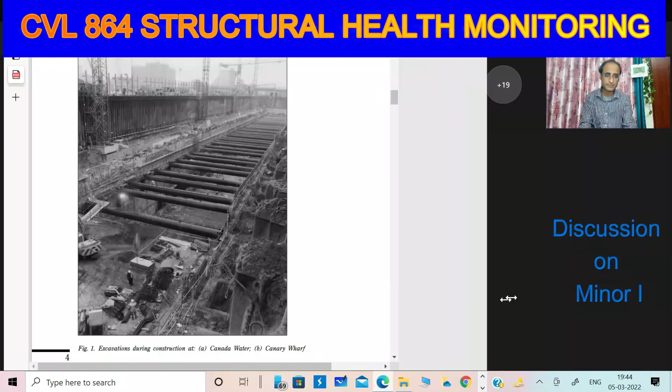This is an underground excavation. So anyone here from the part-time students who is involved in metro? Yes, you sir. Please call out your names because I'm not able to see your pictures. Who are working in metro? Sir, Himanshu. Oh, Himanshu. Okay. Sir, Akanksha. Himanshu and Akanksha both are working in metro.

So do you do any monitoring over there? Structural health monitoring? Or is it a different department? No, sir. Not right now, sir.

Okay, so basically what you see here is an excavation, and excavation needs to be guarded by vertical panels, and these panels are kept in position by these circular compression members. These are pipes. These excavations are quite deep, 30-40 meters.

Struts. So there was one accident in Singapore in 2004, Nicoll Highway Expressway, where one of these struts buckled out. When it buckled out, that led to increase of the forces or stresses in the other adjoining struts also. So eventually it broke down, and it caused sinking of the highway nearby. So these should be monitored.

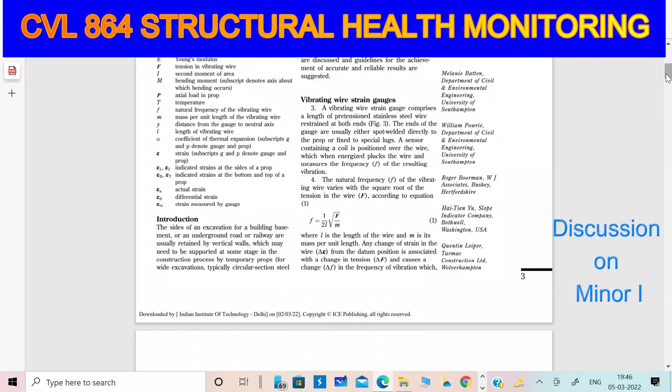So here I am showing you this paper. It's a very interesting paper written by Batten, and these people are sort of pioneers in monitoring underground excavation. Sir, is it the Nicoll Highway? No, this is different. They have done monitoring in other parts of Europe.

Okay, so they suggest that if we are monitoring a circular section and we are interested in finding the compression forces, we should instrument at least 3 sensors. At least 3 sensors should be there. That's what they are advising.

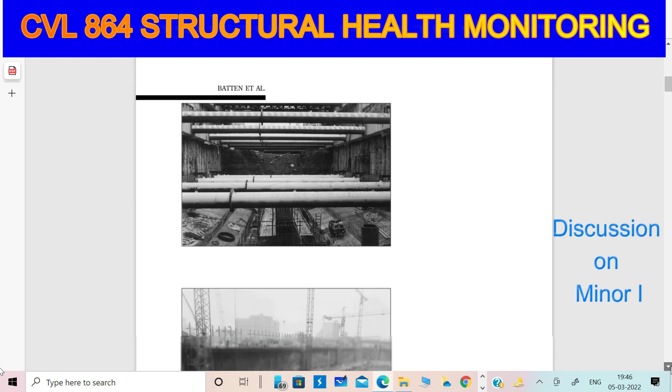Why? Because when we are subjecting a strut to compression, unwanted bending will always be there, because struts which are very slender show a pattern of being drifted on one side on account of the compression forces. That's like the precursor to buckling.

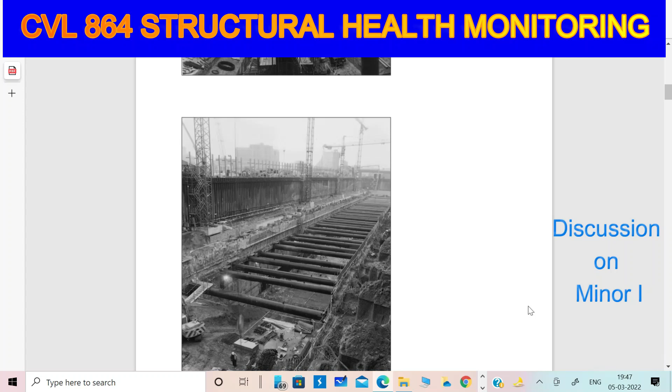So to eliminate the bending stresses, it's very important that we should have multiple sensors, and they advise a minimum of 3 sensors, at least 3 strain gauges. Then we can measure the actual force to a reliable degree.

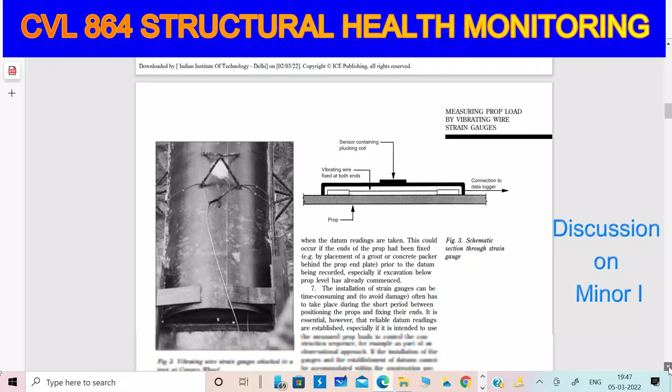So it will be very good to read this paper, because they have done a lot of practical studies with the underground metro. I'll share this paper, or you can find it yourself. It's available in open access also. And now I want to highlight something. Let me share the Word file, the question paper, and then we'll discuss it, and I'll also show where the mistakes were.

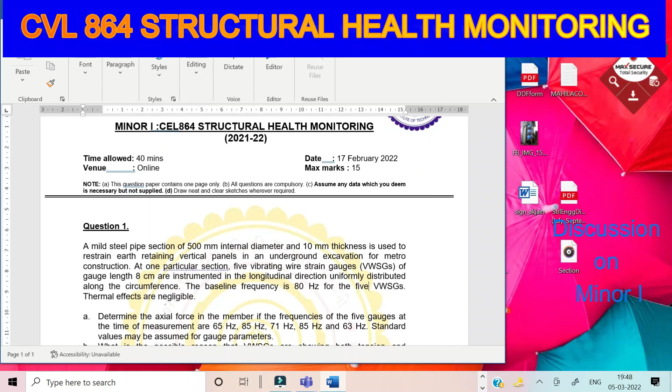So question number 1. A mild steel pipe section of 500 mm internal diameter and 10 mm thickness is used to restrain earth retaining vertical panels in an underground excavation for metro construction. At one particular section, 5 vibrating wire strain gauges of this gauge length are instrumented in the longitudinal direction. The baseline frequency is given for these 5 sensors. So these details were given.

So you were asked what is the actual force, because we are getting different values here. Some are showing tension also. So what is the force in the pipe? That's one question. And second, why are these vibrating wire strain gauges showing both tension and compression, while we understand that the pipe should be under compression?

So the part B reason must be clear now, because whenever we subject a slender member to compression, there will be some bending because of the tendency to undergo buckling. That is the reason that although the member is under compression, some sensors are still showing tension. Alright, and part A.

So in part A, most of you made the mistake of using only one sensor to calculate the axial force. No, you have to use all, but they are not to be algebraically added. You have to find the average strain. The average strain will eliminate the bending effects.

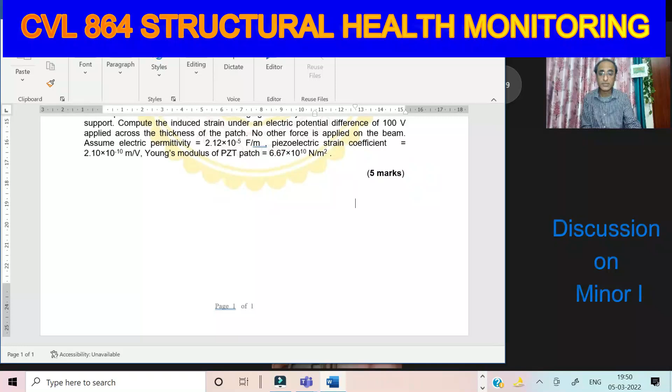Now let's see some of the possible configurations, so that will further answer your queries. Some of you have raised queries. So let's say I choose a circular section. I am using a tablet pen, and let me just draw something first. Insert shape. Let me insert some circular shapes.

Sorry, this is... sorry, I am a little bit stuck. Just give me a minute. Yeah, now it's in control.

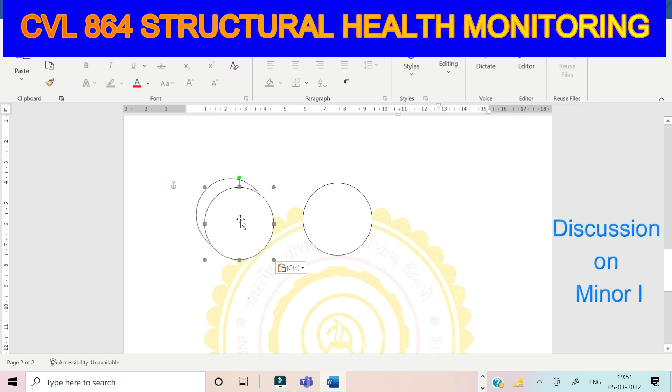Let me just insert here circles, shapes. Let me make 2, 3. I hope my screen is visible to everyone.

Yes, sir. Okay, so let's say I am using the draw command. In general, can we predict about which axis the member will undergo bending? If we have a circular section, is there a way to predict which would be the axis of bending? In the case of an I section, it would be very pragmatic to say that the buckling tendency is about the weaker axis, right?

Or if bending is happening because of some other reasons, then we can make some guess. But in the case of a circular section, can we make any guess about the axis of bending? The answer is no. So what we do is identify that the bending could be about the horizontal axis or the vertical axis, or a combination, right? We can always split the bending.

So if, for example, we are installing only one strain gauge, let's say here, will it give us an accurate value? Can one strain gauge give us an accurate value? No, sir. No, because it may be in the tension region. The strut is under compression, but the strain gauge may show us tension, because we never know.

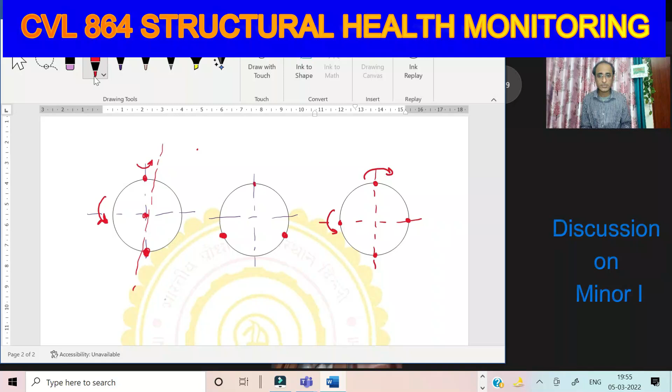Okay, but let's say we have only 3, will this be okay or not? Let's say we have only 3, but they are uniformly distributed, at 120 degrees. So we have here and here, these 3 are there, 1, 2 and 3. Will this be able to eliminate bending? What is your call on this?

How much is this angle? This angle is 30 degrees, right? So what is your call? Is this three sensor configuration suitable or not? Let's say the bending is about this axis. Then what will happen? Will the bending be eliminated or not? I think no, sir. No?

See, what is the distance of sensor number 1 from the neutral axis? It is the radius. And what is the distance of 2 and 3 from the neutral axis? Because the angle is 30 degrees, it's half the radius. So whereas this one is under compression, these two will be under tension, but the tensile strain will be half of that of the compression one, if we assume everything is in the linear range. And the combined strain from 2 and 3 will be just equal to the one in compression. Do you agree?

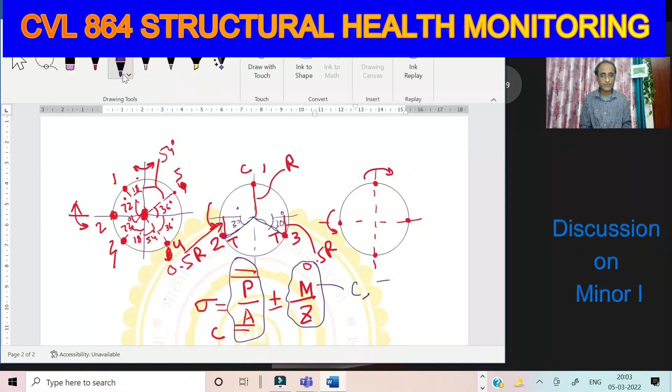So if the bending is not very significant, then the net will always be compressive. But if the bending is very high, if the member is showing the tendency of buckling, then at some places the net could be tensile. So the distribution could be like this. You understand?

Yes, here we have compression, but at some places we can have tension also. So when you are doing the averaging, that process eliminates the bending. Sir, for that we have to add the absolute value or not? What do you mean by absolute value?

Sir, I mean, you are saying this tension part, if we subtract the tensile strain from the compressive strain, it is going to eliminate the bending. Yes, finally it is going to be averaged out. So absolute, what we are doing is we are using the 4L square, then rho, then the Young's modulus, and then the F2 square minus F1 square. So this is the baseline frequency.

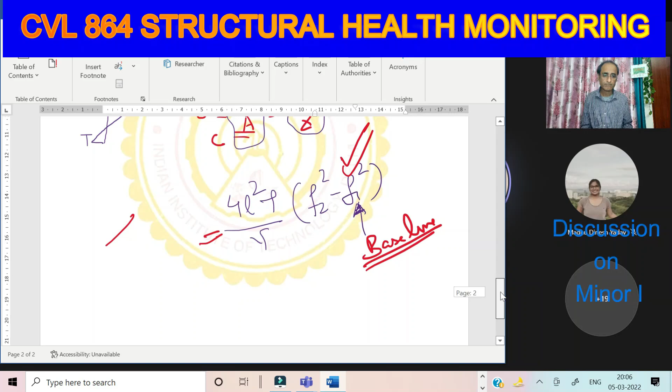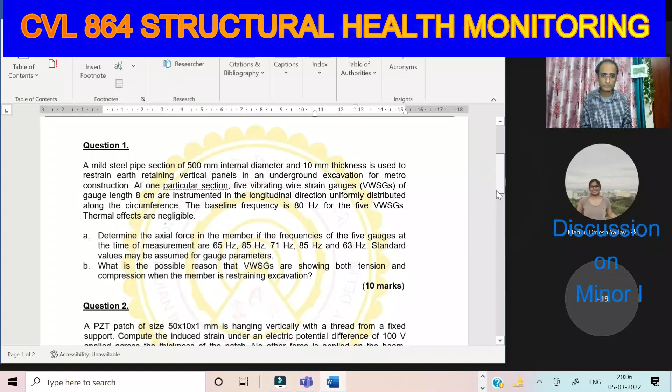Sir, suppose we have one case with only two sensors, one at the topmost fiber and one at the bottommost fiber. Suppose an eccentric load is acting in that case. If we are going to average out the strain values, how are we going to get the load value? I'm still a little bit confused regarding this.

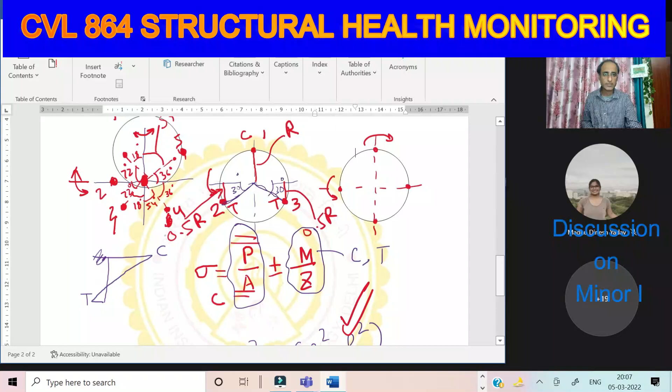Let's say we have, let me go to next page. Theoretically you can show it, you can convince yourself. Let me just rub this out. Let me go to the next page and I'll just show you.

So basically, when you add those two, Himanshu, that axial component will be twice. That's the reason averaging out will be needed. The M by Z components will eliminate each other, but the P by A component will be considered twice. Himanshu, I hope you understood.

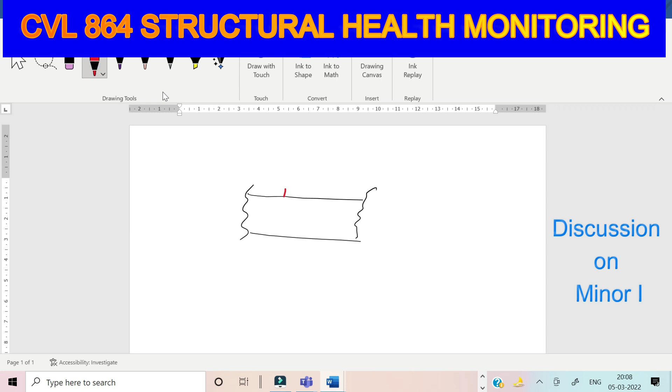Let's say we have a beam, not just circular. We have gauges at the top and the bottom. The same technique we use with piezos, but let's say here we are using the ESG. Let me just draw it correctly. So this is one gauge, this is the other gauge, just two. This is, let's say, the neutral axis. So for example this is under both tension and bending.

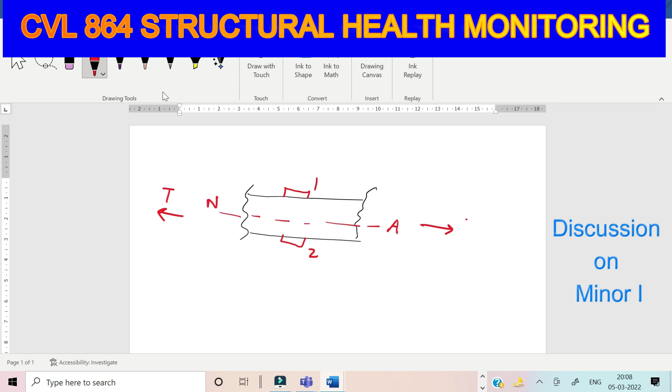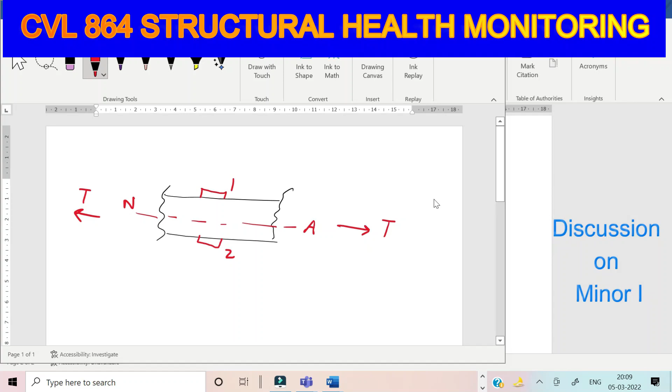Screen is not moving. Is my screen visible? Sir, it's frozen. Okay, let me unshare and share again. Is it visible now? Yes, sir.

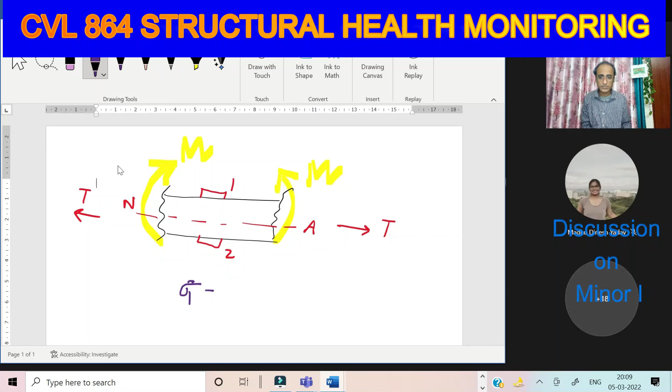So I have drawn here this section which is under combined axial force and bending, showing a sagging moment. So what will be the net strain here? For the top one, putting it in terms of stress, it will be P by A minus M by Z, and for the bottom one, P by A plus M by Z. I can just change the symbol from T to P.

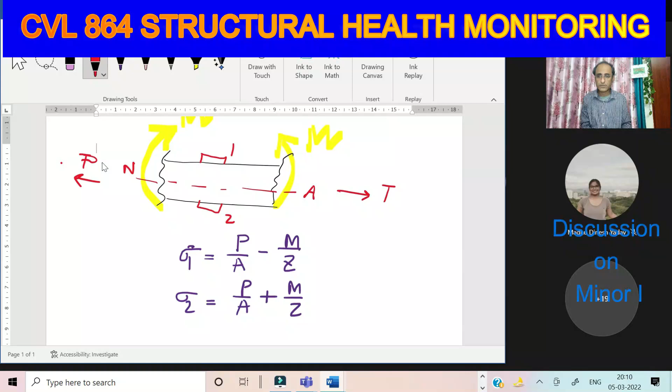All right. Now you just take the average. What will the average give you? If you just add them, the average will eliminate the bending part. So the average is simply P by A. So bending will get eliminated. Okay.

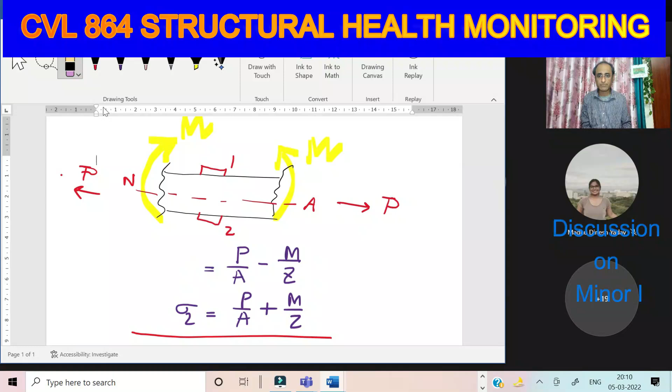So even for the piezos we use this concept. For example, if you have asked this question, let me just show you the example of the piezos also. Suppose these are the piezos. Okay, I'm just erasing some portions. So if they are, for example, piezos, and let's say the member is under combined bending and axial force.

So what we do, the top one will be under compression. That means, let's say if the exposed surface is getting positive charge, the bottom, the bonded one, will get negative here. And what will happen in number 2? It will be the other way, because the bottom one is under tension, so it will be like this.

Alright. Now how should we connect them? Number 1, how should we connect them if we want to eliminate bending? How should we connect them if we want only bending? You understood? First, I am asking you the question. Now this is under dynamic condition, and we want to only obtain the axial modes. If we want to obtain axial modes only, how should we connect them?

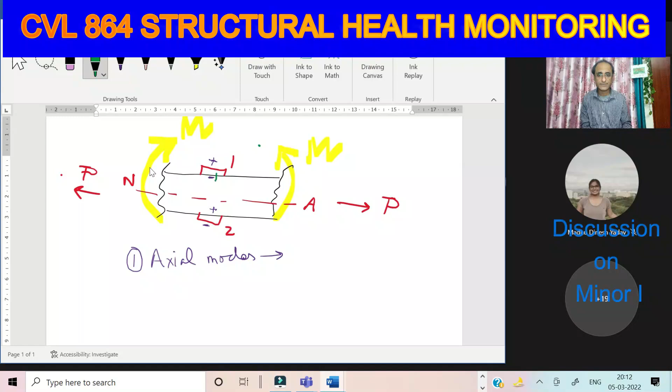Let's say if you want only axial mode, then you connect like this. Okay, and what you have done is that the inside of this you have connected to the outside of this, and these we are sending for the voltage measurement. So this connection, if for example there is any bending, that bending will cancel out. It will be like this.

Suppose this is pure bending, there is no axial force, then what will happen? The arrangement will be like this. You are connecting like this now. So the net will be 0 in the case of bending. But if it's axial force, what will happen? If pure axial force, both will have the same type, because the member is under uniform tension.

So the outside face will be, let's say, positive in both. So we will get the pure axial thing and the bending will get eliminated. Okay. But this is valid only if the section is symmetric, bisymmetric or monosymmetric. So axial modes, this connection, and if you want pure bending modes, then you have to connect in a different way.

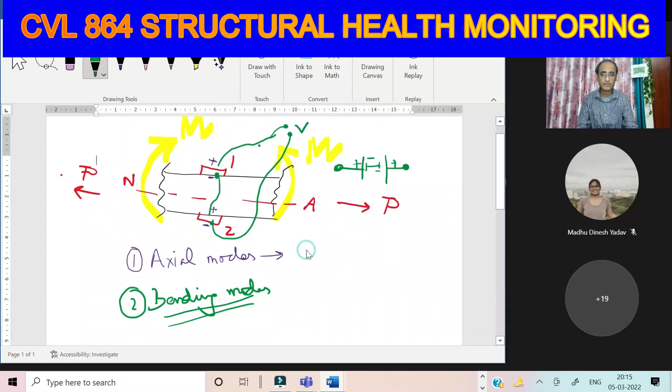Okay, now I hope question number 1 is clear to everyone. So now I am sharing question number 2. Question number 2 is that a piezo patch of this size is hanging vertically with a thread. So basically the piezo configuration is like this, a piezo patch with a very small thickness, hanging vertically using a thread, so no restraint. From a rod it's hanging, and now we are applying some excitation.

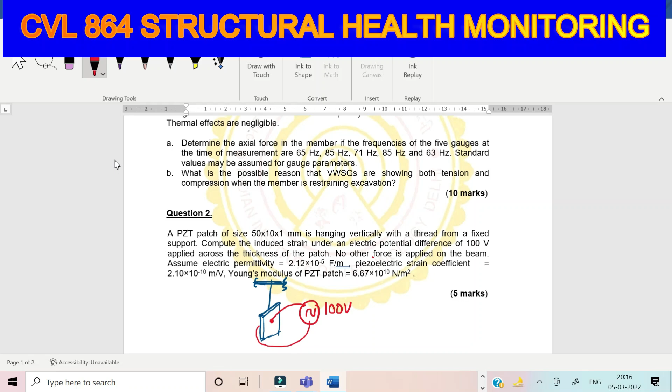So compute the induced strain under an electric potential difference of 100 volts applied across the thickness of the patch. Now we are applying an external excitation, one terminal here, one on the opposite one, and we are applying a potential difference. It could be static or dynamic, so we are applying 100 volts. Okay, so is this converse effect or direct effect? First question: is it direct effect or converse effect?

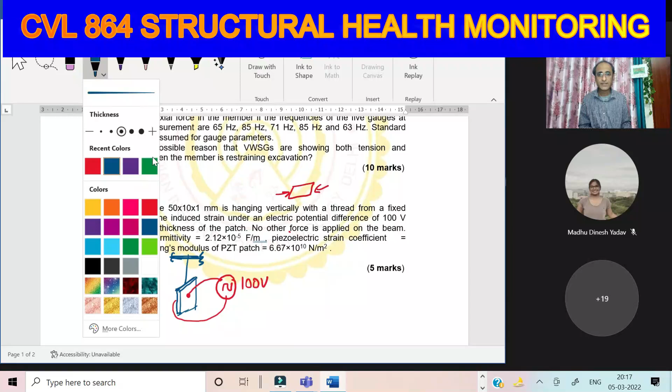See, direct effect is when we are applying stress. Direct effect? No, it's converse effect. Okay. No. Why it is direct effect? Direct effect is that when we have a piezo patch and we are applying stress, because of the stress we have the charges. So how is this direct effect? Direct effect is this: when we are applying stress, that stress gets converted into charges, and by the analogy of the parallel plate capacitors, the charge is accumulated and that is leading to the voltage. That is the direct effect.

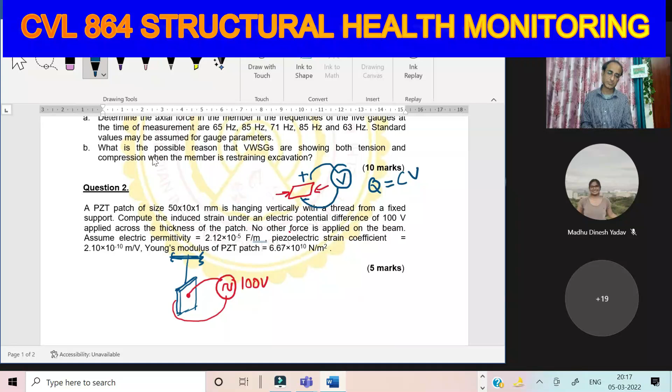But here in the question we have converse effect, not direct effect. So what is the equation of the converse effect? In the converse effect, the strain would be because of the applied stress, which is 0 here, because there is no stress, we are keeping it free hanging, plus the other component, which is because of the electric field. So it's just like strain under thermal effect. Thermal effect also induces strain, that is called the thermal strain. So this part is just like the thermal strain.

Suppose this was hanging like this and you are heating it, what will happen? It will undergo expansion, but it's stress free, so it will not have any stress. It will have strain, the thermal strain, but no stress. So the same thing is happening here, it is undergoing this much strain. What is asked is to compute the strain induced under an electric potential difference of 100 volts. So it is a converse effect, and you have to use the equation of the converse effect, not the direct effect.